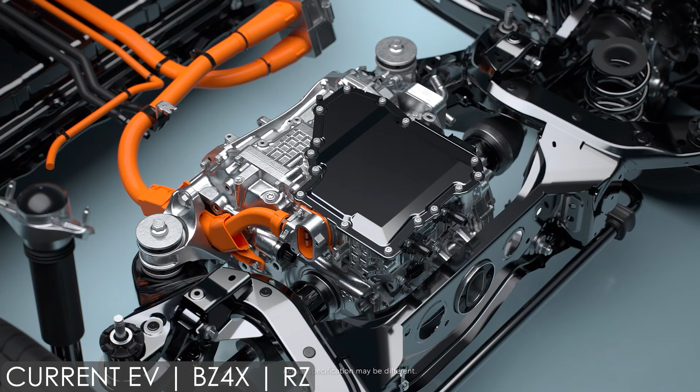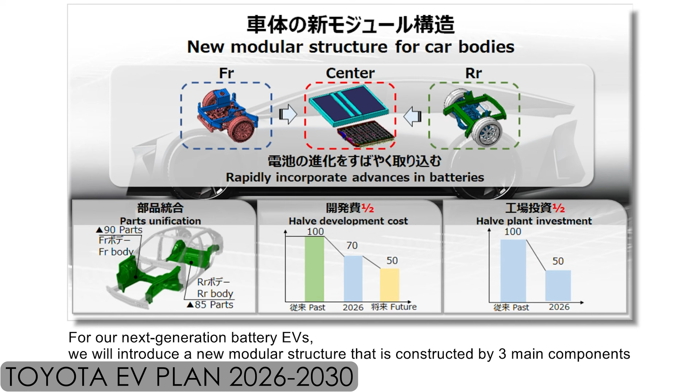It's an electric vehicle that was mainly created to launch their Beyond Zero program. This year they've had a massive management and executive shakeup and have reshaped the vision of the future of what they want to do as a brand for electrification. By 2026, you're going to have a massive influx of new electric vehicles on a brand new modular architecture, where they can scale out a platform, have different front and rears, scale batteries out to make SUVs, cars, and we see this with many other brands. This is what they're doing coming soon.

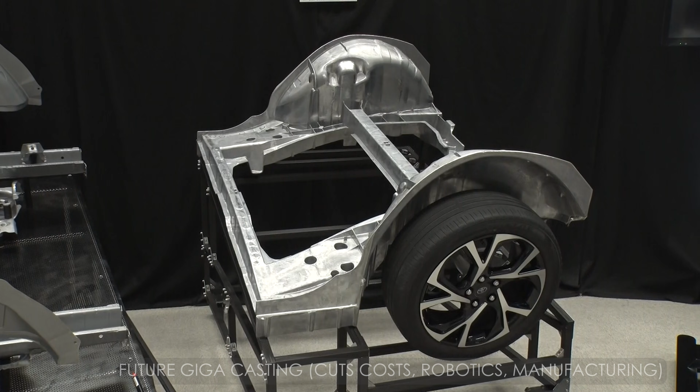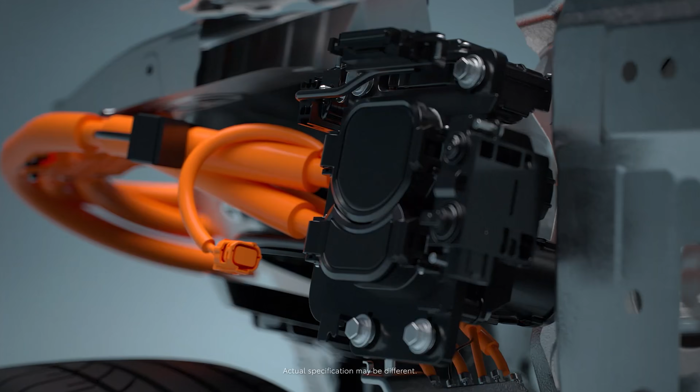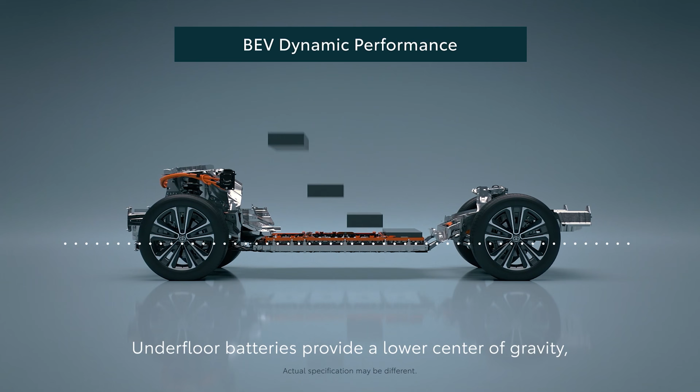So what are you left with with this thing? Well, not much. It's something that should literally just live in a showroom, or in terms of marketing to say, hey, look what's coming. It's not a vehicle that you want to buy and be stuck with. And I will say this, what they're trying to do is say, hey, look, this is kind of our vision. And as a customer, that's fine if you're buying a phone or some disposable consumer electronic device, but not something you want to invest over $50,000 on.

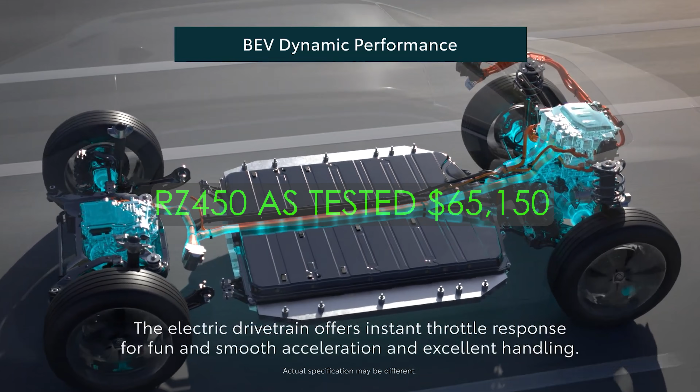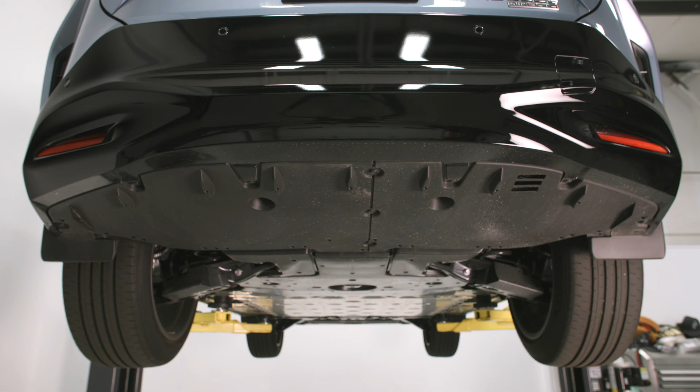This is barely a 400 volt architecture. It has a 71.4 kilowatt hour battery pack, and the range, at least on this version, depending on the tire option you choose, from 18 to 20 inch wheels. The 20 inch option barely gets 196 miles range, and if you're running the HVAC system, it drops to around 160. Now, Toyota has said that despite this lack of technology in this current generation battery pack, it's going to be stable throughout the life with minimal battery degradation. You have a cooled battery pack, you have a heated battery pack for multiple seasons.

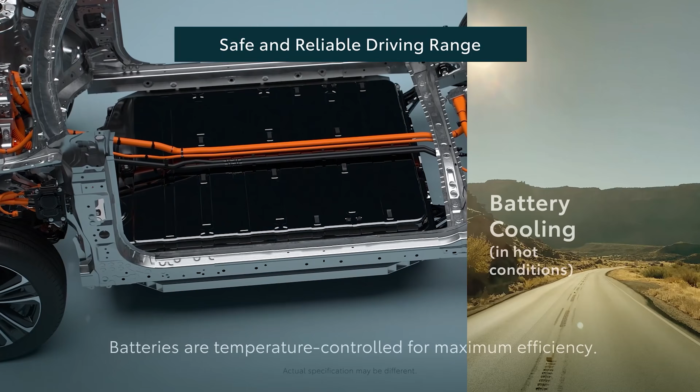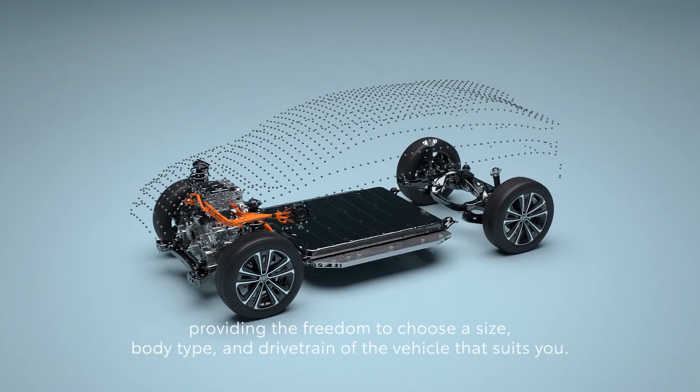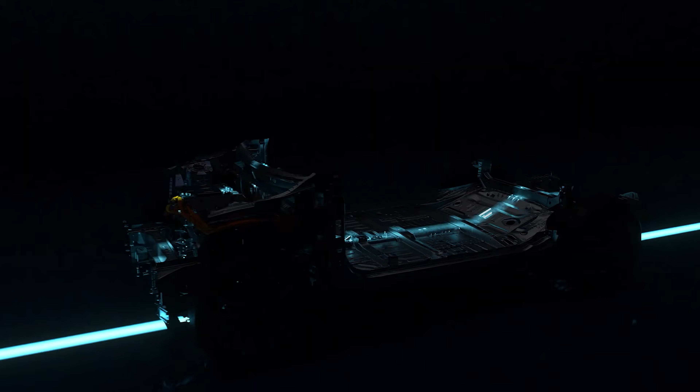And with the dual motor design, it's going to give you all season capability. But because this is maxed out at 150 kilowatt charging speed, it's not something that is going to be DC fast charged in crazy amounts of time. The battery efficiency is nowhere near the top level EV makers at this point, and the electric motor design is on the archaic side for this first generation.

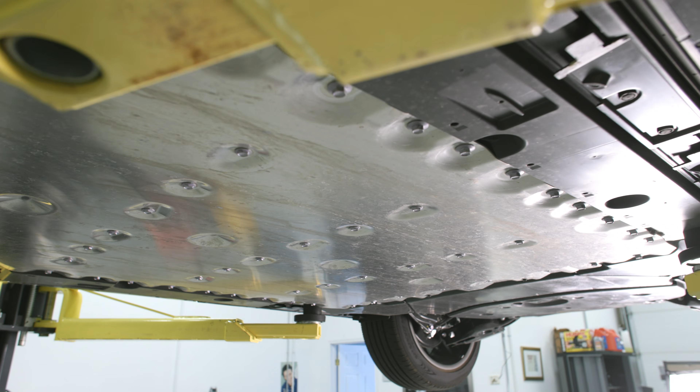I'm gonna say this, just like the BZ4X, there are some things here to take away where you can kind of see the future of commodity EVs, and there are plenty of benefits of it here. This is not fully representing what they could do with new battery technology. Their goal is to have a vehicle with about 600 miles of range out of their commodity setups by 2030. Like 26 to 2030, that's what we're gonna see. That's not this. This is not on their new architecture.

So I'm gonna drive it. I'm gonna walk you through what they're doing today so we have a basis for comparison to what they're gonna be doing tomorrow.

All right, let's get this bad boy off the line, see how she goes. Sounds futuristic, but I'll tell you one thing, I'm gonna have to put this back in normal so I can make it home. So let's get right down to this, right? You're driving this as a regular car.

We know that this is a very here and now generation, a beta generation of electric vehicles. It does not have the most efficient, most advanced battery pack technology. It's not using the latest cutting edge, high-end electric motors front and rear. It's just supposed to give you a taste of what Lexus and Toyota can do as a brand. What I will say is that the electrification of mainstream commodity cars will have a great effect on Lexus as a luxury brand. It's gonna essentially do the same thing for every brand, but their core mission of what Lexus was trying to do as an earlier luxury brand, the refinement, the quietness, it's all here.